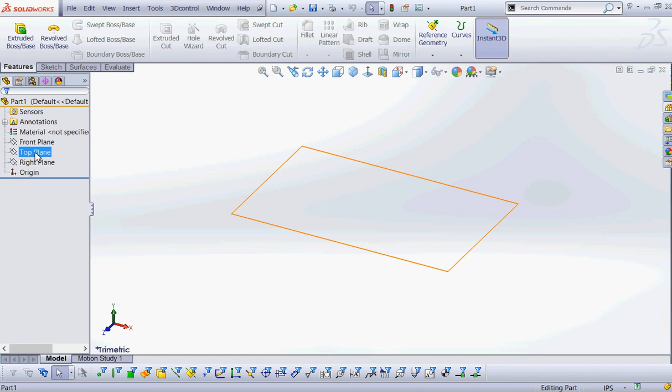Yeah, well, GrabCAD is basically a resource, and some people are really great at doing CAD, some people aren't. So you download the model and you check it out, and you decide whether it's worth your time or not. There's some stuff that's really great, and some stuff that's not so great. It's kind of like a buyer beware type of thing. Same with 3D Content Central. People upload stuff to it, and some of it's great and some of it's not. Any other questions?

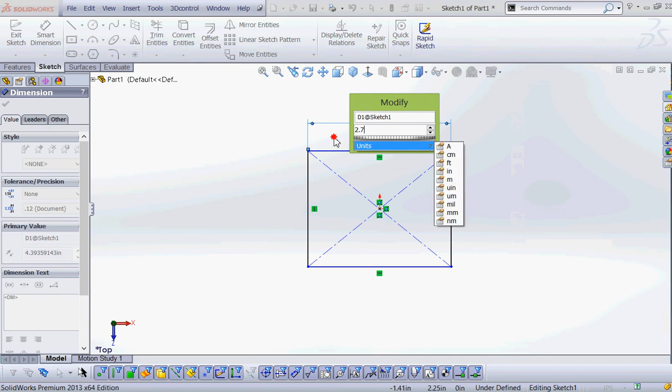Okay, so we're going to start on the top plane. We're going to put our first sketch on the top plane right here. New sketch. We're going to do a center rectangle. So center rectangle right here on the ribbon. Coincident to the origin. Bring it out. Now this is 2.7 by 2.7. So I have a choice. I can put the dimension on both sides, or I can use a geometric constraint and make them equal.

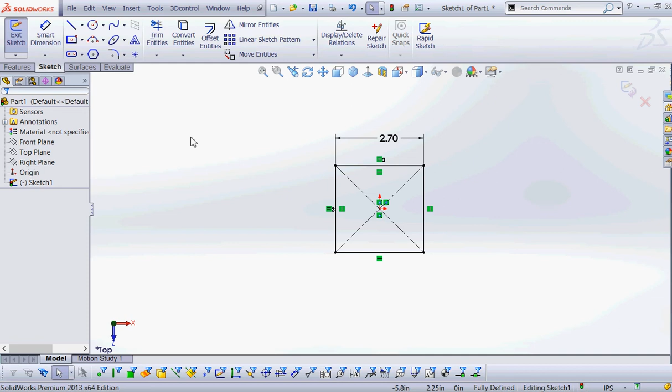Which would be better? To dimension both sides or to set them to equal? Equal. Why would equal be better? Because if you modify one dimension, the second one is automatic. That's right. So less maintenance if you assume that the battery is always going to be square. So we can add an equal constraint. I'm just going to say add relation, select this line, make them equal. All right, at this point it's fully defined.

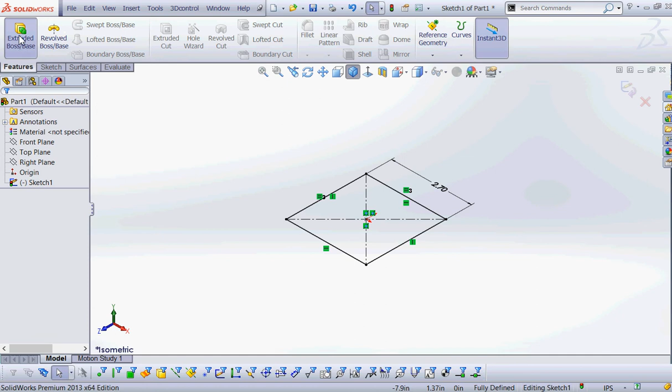Is there anybody lost, needing help? Really? Nobody's lost, needing help? Look at how far you have come. Ron's gonna feel unloved soon. Right, Ron? Where's Ron's love?

Okay. Switching to an isometric view. Zoom out a little bit. I'm going to go over to features. Notice I do not have to exit sketch mode to do an extrude. To me, that's just one extra step. Don't need it, right? Anything that slows me down, even if it's a single mouse click, that's not good. So we're going to do a base extrude. I'm selecting the base boss extrude right here, and I'm going to extrude it 4.1 inches.

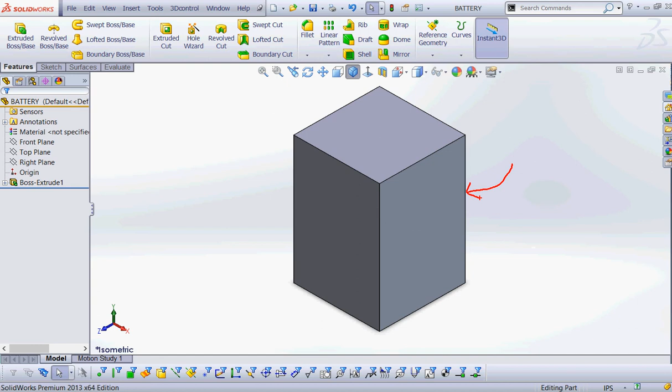And then I'm going to green check. Okay, and I'm going to save. And I'm going to call it battery 12 volt square. Well, I made it 12.

And I'm going to save it. Anybody lost? Anybody needing help? Raise your hand if you're lost, needing help. Ron is feeling useless back there.

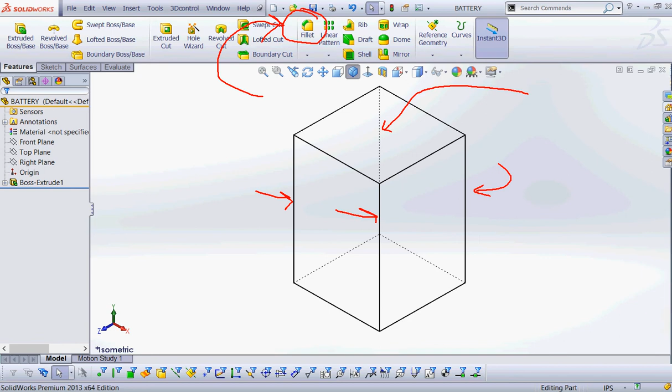Very complex thing. Wait a minute. Remember the first day you guys were... Whoa, now you're sneering at me. Hey, give me something harder.

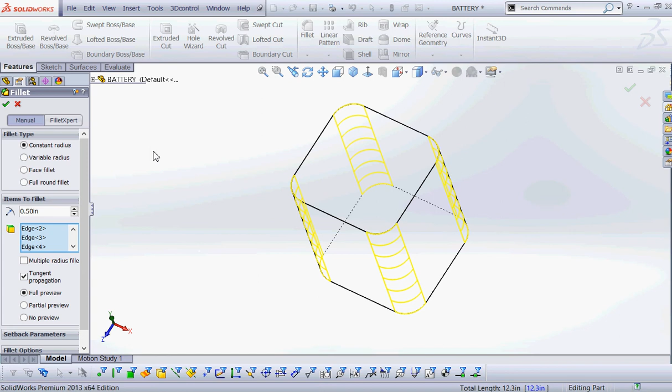Okay, we want to add fillets to the four sides right here. Now, I could just leave it in shaded with edges, but then I'd have to orbit around to get to that back side. So what I can do is switch it to hidden lines visible, and then I don't have to orbit. I can see all four sides without orbiting. Then I've got to switch it back, of course.

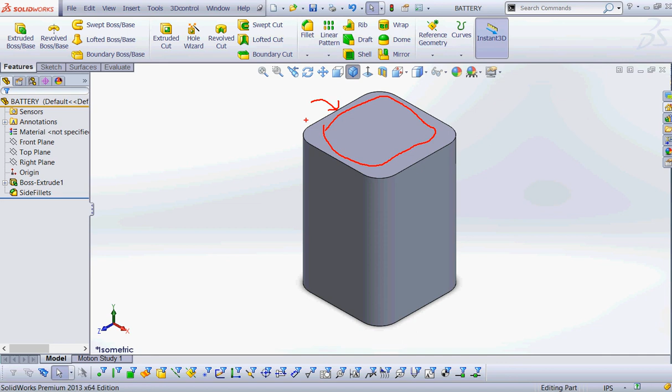So this is just kind of showing you a trick. It's in the book, on page 4-22. I'm going to be selecting the fillet tool right here on the ribbon. Our fillet is going to be 0.5. And I'm going to select this edge, this edge, this edge, and this edge.

And notice it previews. Oops, I got a face. So I accidentally hit the face, so I'm just going to highlight the face and go delete so I don't have to repick everything. See? So I've got all four sides selected at 0.5. And then I'm going to green check. And I'm going to switch it back to shaded, and I'm going to rename my fillets side fillets. And I'm going to save it.

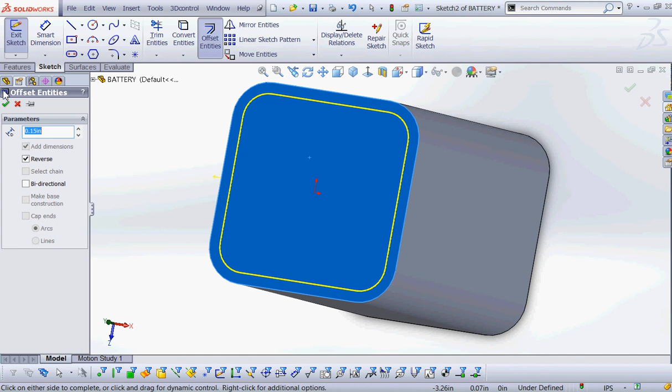Anybody lost? Anybody needing help? Everybody good? Okay, so the next thing we want to do, you're going to want to watch me on this one because it's a little more tricky. We want to create a well for the terminals. So we want to offset the outside edge into the battery, and then do a little extruded cut to create the well for the terminals.

All right, so you want to watch me because if you don't do it right, it takes a few more steps. Step number one, I select this face and I go new sketch. Notice I've got this face highlighted. See how it's selected? Then I select offset entities. See how it previews in yellow? It's offsetting out. I want to reverse it, so I click reverse so it comes in. And then I'm going to change that dimension to 0.15.

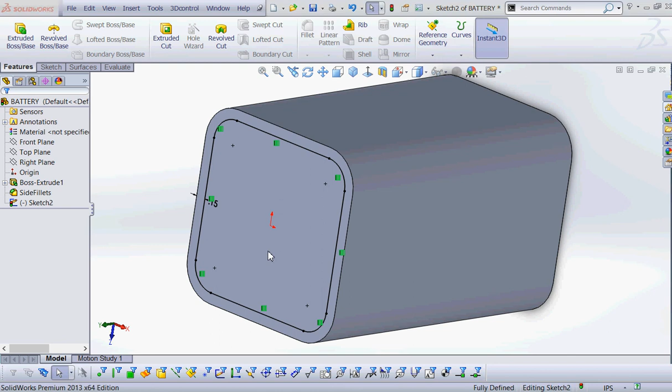Whoops, it went the wrong way, shoot. Okay, let me do it again. Offset, 0.15, reverse, and then I just left click in the window, and it's still going wrong. Offset, 0.15, reverse, and I'm going to green check. I'm not going to left click. Okay, and then it goes correctly. So there it is. To me, that's a bug. All right, so that's what you want to see.

So I'm going to do it one more time. I have this face selected. I go offset entities. I have 0.15. I click on reverse, and then I green check. Okay? Anybody need help? Aha, I got one. One down.

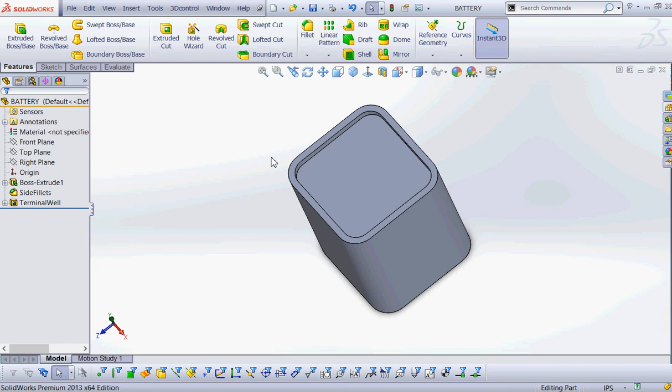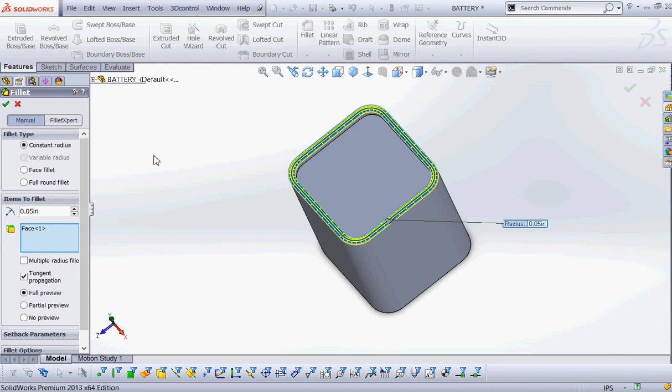Yes. Why didn't you use the shell tool and just set the direction inside? Why would I? Well, to do a shell tool, I'm not going to have it go that deep. I'm not going to have it go all the way down here, right? I could, but then I'd have to have different depths, right? Question. 0.15. Okay. Who else needs help?

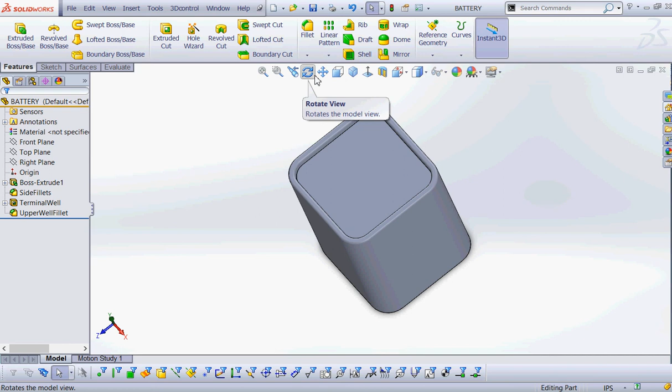We're going to switch over to features, and we're doing an extruded cut. We're going to be extruding this inside face. So I'm going to click extruded cut. I don't want it to go down 4.1. I want it to go down 0.20. And notice it'll preview. There's my well.

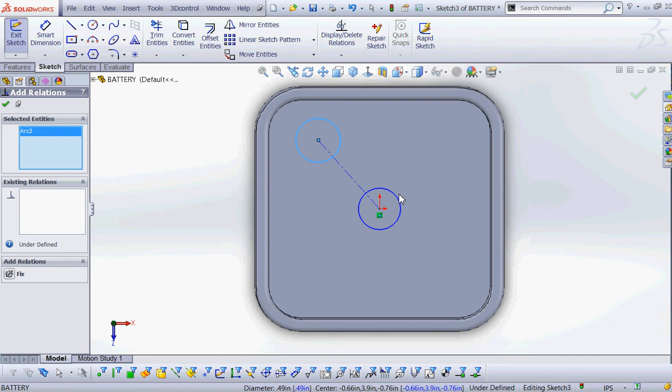So I'm going to rename it and call it terminal well. You said 0.2 what? 0.2 for the extruded cut. And save it. Okay. Everybody with me? Anybody needing help?

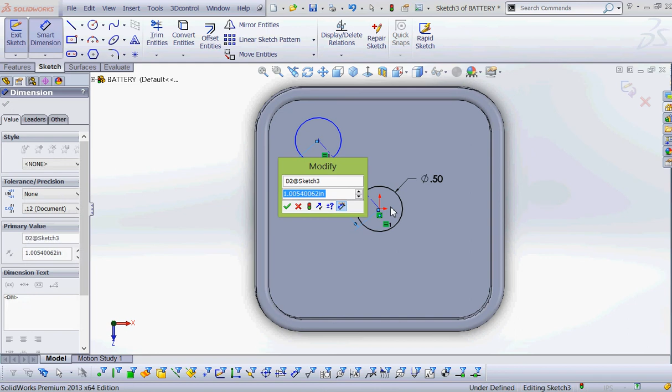So the next thing we want to do is add fillets to this edge and this edge. So I'm going to select this top face, and then select the fillet, and I'm going to say 0.05. Make sure you put that 0 there because that's really important. It's going to preview. Then I'm going to green check. I'm going to call this well fillet. I'll call it upper well fillet. And save it.

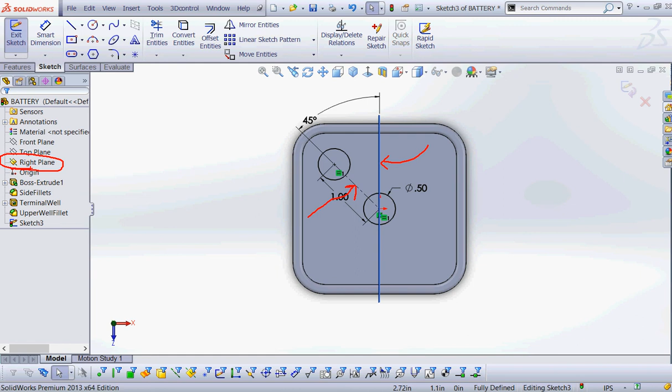Okay, so now we're ready to create our terminals. All right? We're on page 4-27. So I'm going to select this face and say new sketch. I'm going to create a circle centered here, and a circle up here. I'm going to draw a center line between the two circles, and I'm going to set them to be equal.

Okay, now the sketch for the two circles is on page 4-29. I'm going to add a dimension to the circle. It's going to be 0.5. This dimension right here is 1.

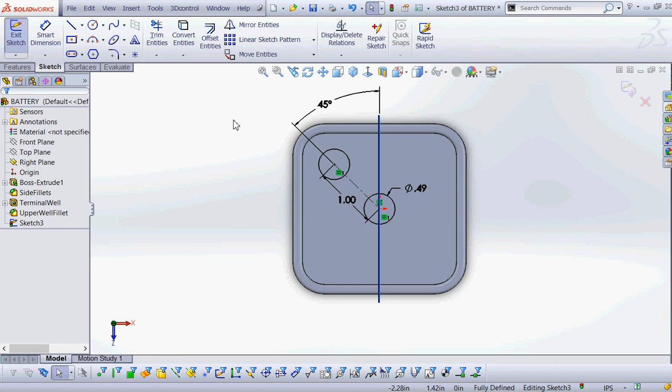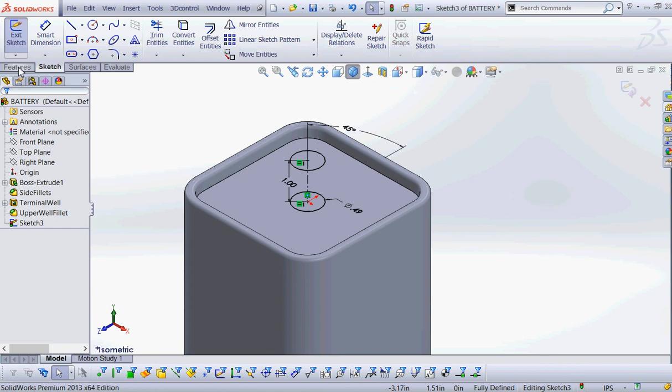And then I need to create an angle dimension. What I did was I turned on the visibility of the right plane, and I'm going to create a dimension from the right plane to the angle. So if I select the right plane and then select this angled line, I can place a dimension.

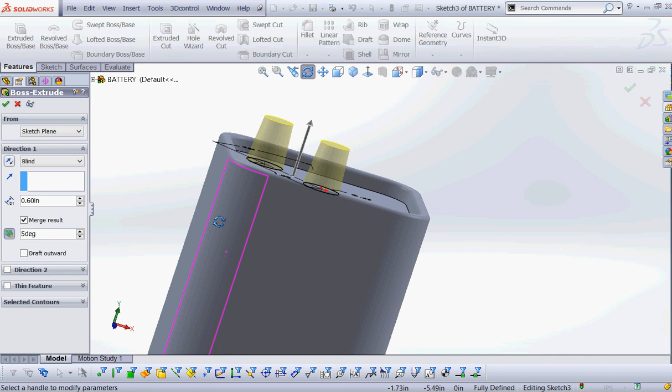And now it's fully defined. That line you made, you just drew that? Which line? The center line. This line? No, the one that's... This one? Yeah. That's not a line, that's the right plane. I just turned on the visibility of the right plane and saved myself some drawing, and set it at a 45-degree angle from the right plane.

Everybody good? Anybody needing help? Andrew needs help. Can you show us how you angle that again? 45? All right.

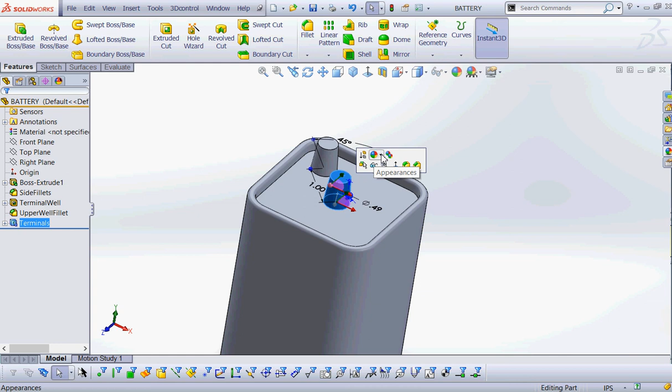So you saw how I have two circles? I added the one dimension, right? That's easy, you're able to do that, right? Okay, so now I want to add that angle dimension. First I turn on the visibility or show the right plane so I can see it. Then I select the right plane and that angled line, and there's my dimension. I just set that to 45 degrees, green check, I am good to go. Any other questions?

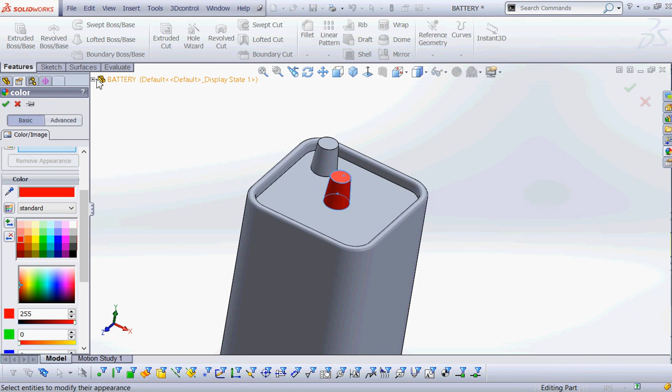Okay, I'm switching to an isometric view. I'm going to turn off the visibility of the right plane, setting it to hide. So I've got these two circles, and what I want to do is extrude them up, but I want them to have what's called a draft, or an angle to them, just like battery terminals have. So I'm going to come back over to features.

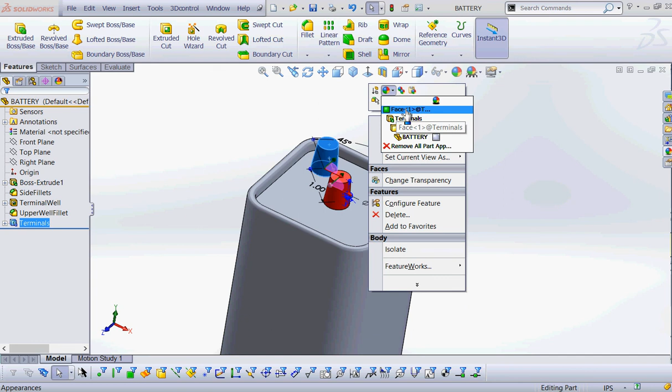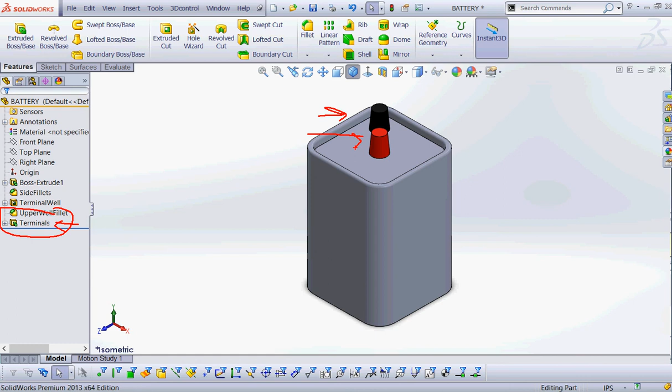I'm going to go to extruded boss base. It's previewing it. I want them to be 0.6. But I want them to have a draft to them. My draft is right here, so if I want to add a draft, I toggle that on, and I'm going to add a draft of 5 degrees. Notice it previews, see how it's angling? Okay, so that's what I want, and I'm going to green check.

And I'm going to rename these terminals. And save.

So here's my battery, and this is where she ends in the book. She's done with the part as far as she's concerned. Now me, I'm not happy yet, because if I'm going to show this to a customer, he's going to look at it. I want it to pop for him to see the battery. One of the things I'm going to be concerned about with the battery is the wiring to it—which one's the positive terminal, which one's the ground. So I want to be able to designate the positive and the ground terminals, make it very clear to whoever's looking at it which is which.

So I want you to watch me because this is not in the book. What I want to do is make this terminal red, indicating positive, and this terminal black, indicating negative or ground. It pops more, and it makes more sense when you see it in a rendering or in an assembly drawing.